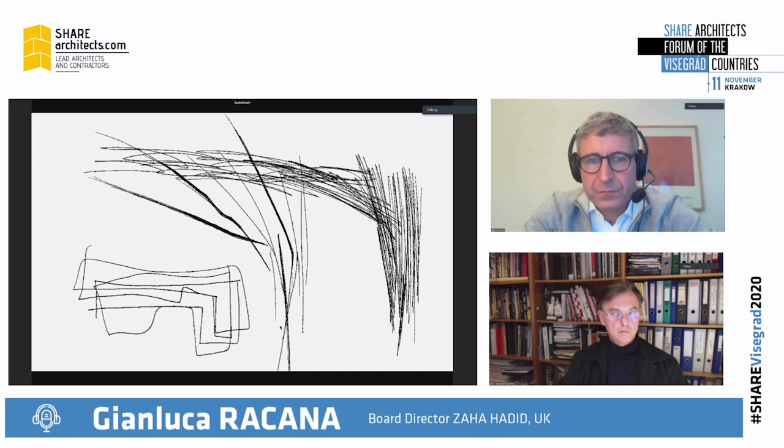We started with ideas of having a building which is not one self-contained object, but a sort of field of elements picking up from the existing urban environment in terms of direction and grain. You can see the first ideas developing how to interlock with existing buildings on site, which we decided to retain. The brief suggested demolishing the area completely, but we retained most of the more important buildings.

We imagined the new museum as a sort of grid or field of many elements, starting from the existing building on site, to the point that it didn't have a facade on the main street. The idea of porosity also plays with the notion that the outdoor landscape is as important as the building itself, following the same design direction and quality, with indoor and outdoor spaces in between—from the enclosed military site to completely opening up on two sides for the new art center.

These are some images during construction and the first exhibition. I think it was a great achievement in that we created something where visitors could explore the interior freely, not regimented room after room.

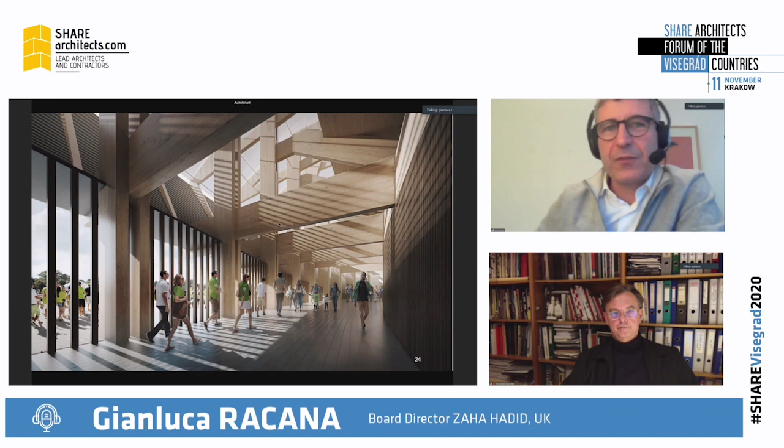Again, it's conceived as a community stadium—you can see it's completely open to the outside. There is no overwhelming presence of retail or car parks, and this has been a great achievement. With the local authority, we're now working on the construction stage.

Building can also have a nice social value. I think this is another example of one of our projects, in Cambodia. It's an institute for research, but at the same time a memorial for the victims of the Khmer Rouge. This was done in collaboration with an academic from Cambodia who himself lost his family during the genocide.

So it was a highly sensitive theme to put into a building form. There are also very grave environmental issues with rain and climate change in the area.

So on one side we wanted to design something sustainable as a building fabric. You can see we resorted again to timber structure and the local way of creating spaces with modular elements, but also to create a landscape in front of the building which acts as a water reserve when the monsoon rain pours in, so as not to flood the rest of the city around it.

This sensibility is important for every project—cultural sustainability is part of our future urban life. Another element, as I said, is an acceleration of trends, and one of these is data-driven design.

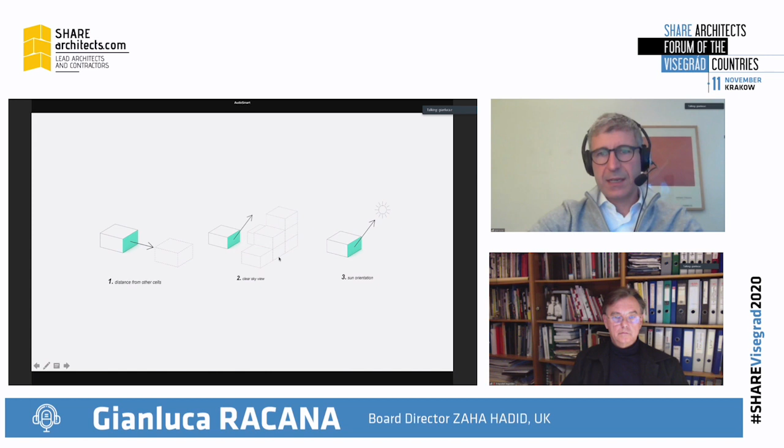With this system we generated a number of options, all valued on a numeric basis. In terms of fabrication, we work with companies to achieve maximum prefabrication—it's clear to everyone in the industry that off-site fabrication is the future, first of all because it's polluting less.

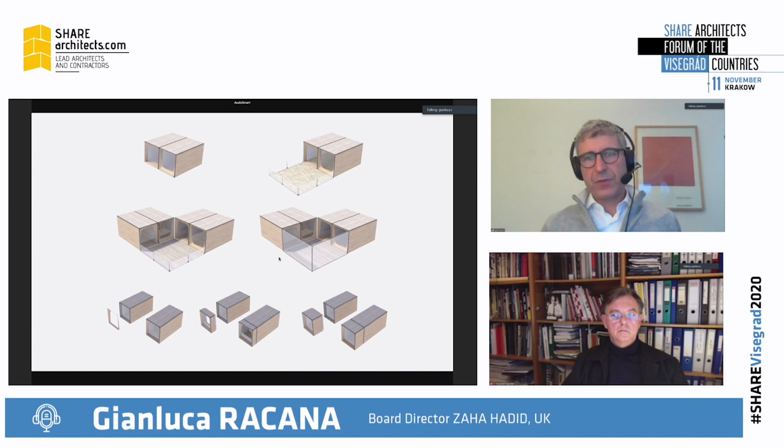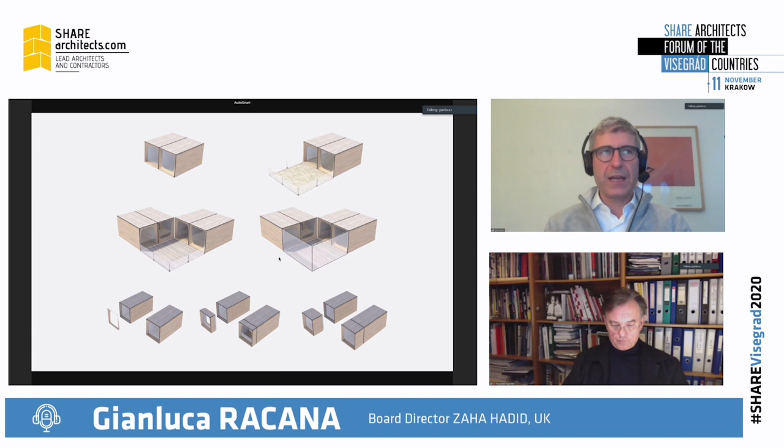The second approach spreads the economic benefit of a building over a larger area. Especially in the UK, most of this manufacturing is based in the north of England, where labor is potentially more available, and where it's possible to have mass production using renewable energy, bringing in finished components to contain construction time. This is clearly energy efficient, and it also gives less nuisance to the city, with less traffic from heavy trucks bringing concrete and pouring wet elements.

This is a study we did for Whitechapel in London, showing how this prefabricated system can accommodate the street landscape. Obviously there is some visual consideration to do - you can't just copy paste the same model everywhere in the city. These are some of the material expressions, with the idea to introduce...

...gardens and production of vegetables on site, on the roof, and between the apartments. This is a new component that goes on the lower floor, with spaces for co-working and for know-how sharing. I think these days, with the pandemic, co-living isn't one of the most popular themes, but I'm confident that once the pandemic is out, this will be part of our city landscape more and more.

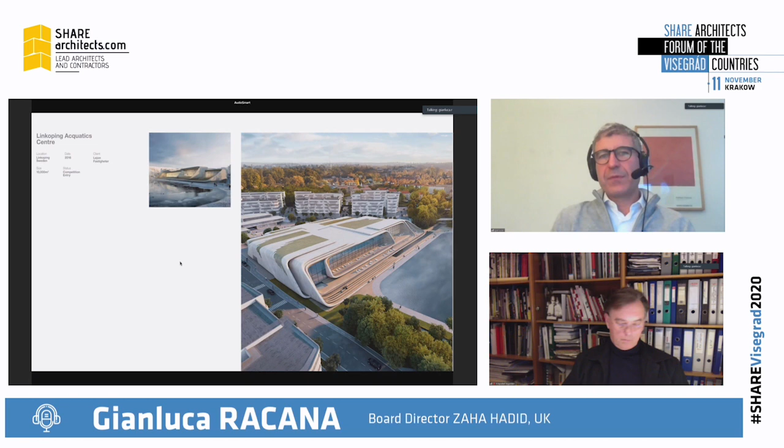Again, buildings need to be green, they need to be sustainable, and they need to be healthy. One part of that is just to reestablish a certain link with the natural environment. I think a building can either impose itself on the natural environment or can play with it. This is the case of a project in...

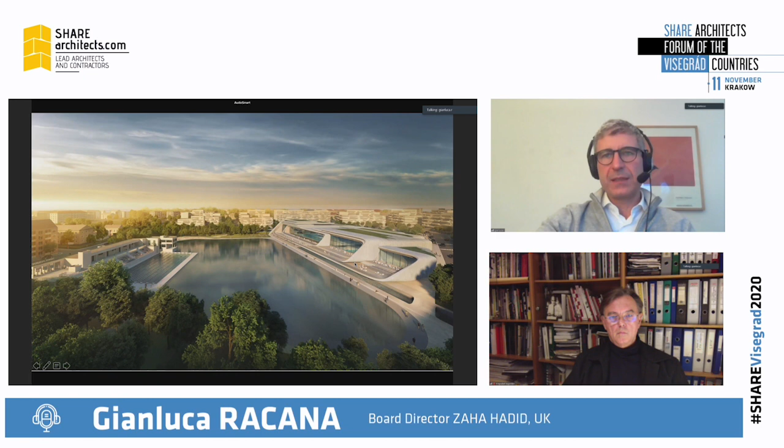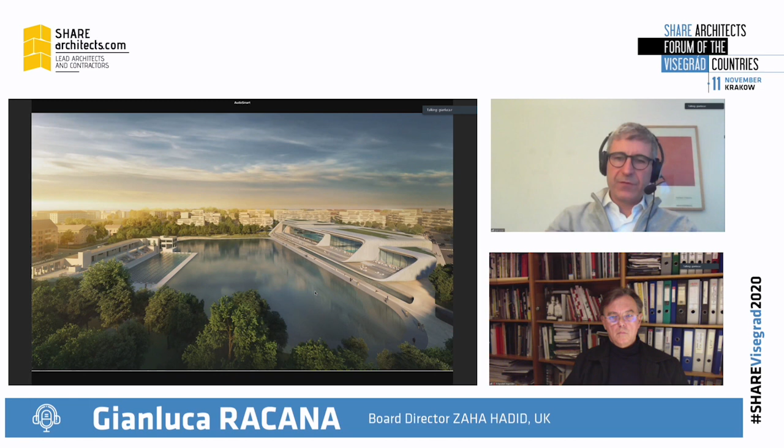Scandinavia, in Sweden, where we were called to expand the existing city pool on the edges of a lake. The idea was to reduce the lake somehow and put an extension of the swimming pool there. Instead, we proposed to keep the water as it is, make the building as compact as possible, and play with the formal edges of the building and the water, so that the building component and the natural one play together, using natural materials to create an environment which feels and looks as natural as possible.

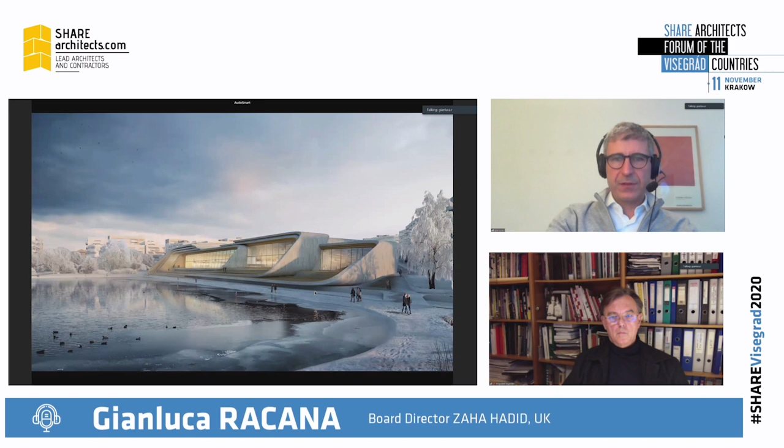These are some of the visuals. During the winter, the lake is frozen, so there are certain types of activities. During the summer, it's open on terraces - there's as much outdoor space as indoor space here for the swimming pool. So this is in terms of the building.

I think there are other issues which the pandemic has brought over to us as designers, and the main one is work, the office. Design of the office, how the working will be - I think this will be one of the bigger consequences of this pandemic. Work will not be as it used to be. It will be at home, as we all do now - I guess you can see from the background, most of us. It can be in the usual working space, or it can be in a third place, which can be a coffee shop, a park, it can be everywhere.

This poses a problem, especially in cities like London or New York, where there is a consolidated downtown, a consolidated city center for offices, which is a single function occupying a large part of the city. This has been addressed already somewhere else - we work in Australia quite a lot, and I know that...

...this is a project in Melbourne, which is coming up consistently on top of the quality of living rankings, together with Copenhagen and other Scandinavian capitals. There was a program that started really 10 years ago to allow the city center to diversify from purely office use to a mixed use - residential, retail, hotel, leisure. I think this site in Collins Street is the main avenue.

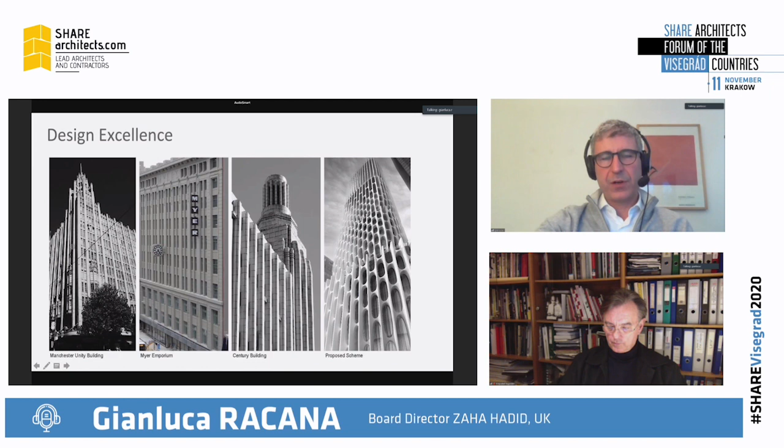But obviously as well as the ground floor and the public realm activation, Melbourne is famous for its alleyways, which started as delivery side streets and now are the center of life in the central business district. The CBD of Melbourne at the moment is the center of the nightlife of the city. Increasingly, there are bars and cinemas, they start to be resident. So they achieve, in a way, a mixed-use community, which goes away from the pure office use of the city center.

And in our project as well, we created a passage between the two main streets. We created a building which you can see on the footprint is reducing, so it's opening up. All this paved area is new with a sort of public plaza in front of the building. And as well, we introduce a real mix of living within the tower.

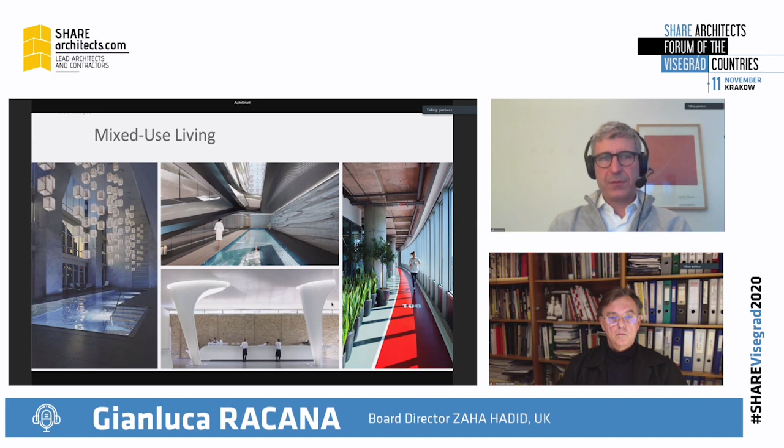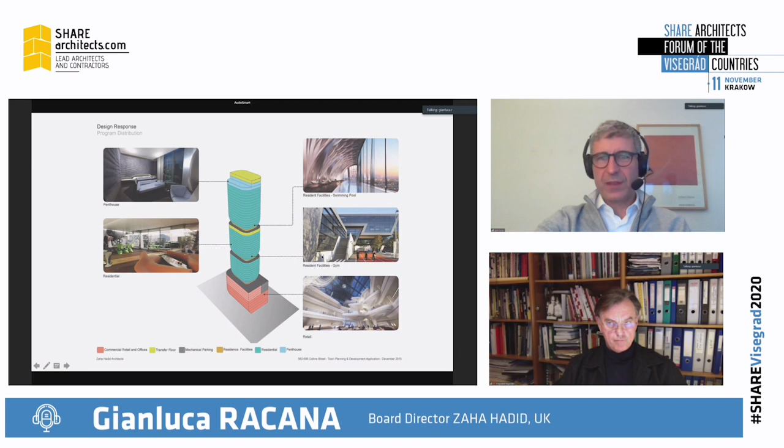The tower typology was given because on that location there was a taller tower before that was demolished. The mixed-use living in this tower we designed to express that, with changes of shape for the top, which is the resident area, to the mid one, which are service apartment, hotel, office, and food and beverage and retail. You can see every time there is a change of function, there is a common space for the resident or office worker with a terrace attached. And on one of them, there is a gym running track.

So I think this is an interesting example of how a large part of the city, which at the moment in the city center is only used for offices, can be reconverted. But I think today we're speaking as well of a different trend, how completely residential areas can provide a mix of function, maybe with business, maybe with an office center.

So we can reach what is the 15-minute city, the ideal polycentric city where residents can reach by walking or by bicycle all the functions they need in their daily life, and they don't need to travel by private or public transport to a faraway city center.

Speaking of mobility, I think transport and moving is one of the predictions or trends we can see - moving will be faster, cleaner, quieter, and safer. Obviously there will be much more emphasis on walking and bicycle lanes, and I can show you some projects later on where we address this. But first I want to touch on city mobility and public transport.

This is an example I wanted to show of two metro stations in Oslo we're working on, in the Fornebu area. This island was the former airport, which was decommissioned, and now it's a mixed-use area, which is a very important urban project in Oslo. We did a competition, and we won two of them.

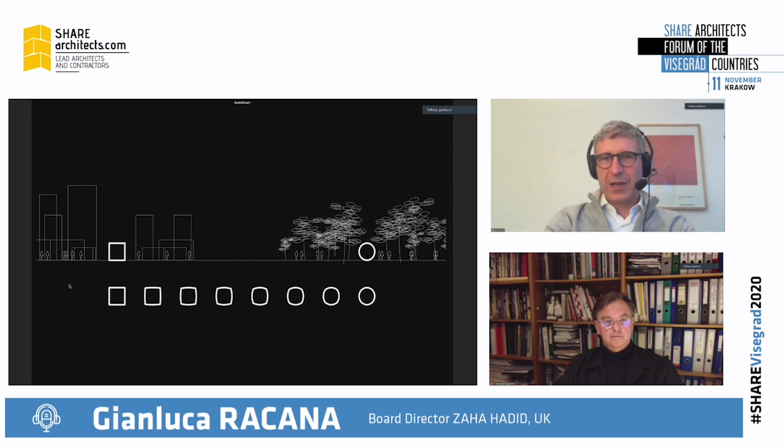We play a bit with the idea that the station is somehow the bridge between this natural little park and the city, and the office block where the other exit is. And as well with the idea that we want to give the user a clear idea of where they are in the station, by giving a visual reference, or formally connotating the station entrance with a square or a circle. You can see the two different shapes of the entrances.

But that's why we wanted to give something else as well - we call it the sun below. We want to give people entering the station a sort of experience of time passing on the top. This is a very interesting study we've done with a lighting artist, where the quality of light outside changes during the day - it becomes from red to more blue and then red again.

It comes from a different angle. We thought it would be great experience for people using the metro every day to see that character of lights changing in the station, to know what time it is outside, and to have a different point of view of the infrastructure every day.

In the Scandinavian countries, natural light is very important. I've found by working there, we obviously have very long nights during the winter. So the summer and the natural light is really enjoyed by all the population.

So you can see how it's a simple system of lighting. They start from the square part of the station, which is the office part. It can change by changing the LED lighting behind this panel. During the night, you can see a much warmer color.

This is the other side, where, let's say, this is the evening when the sun is low, so you can see this kind of lighting around, at a different time of the day. I think it's a very simple little trick, but I think it gives the right focus. Infrastructure and transport needs to deal with passenger experience first, rather than the engineering part, which obviously is taken for granted.

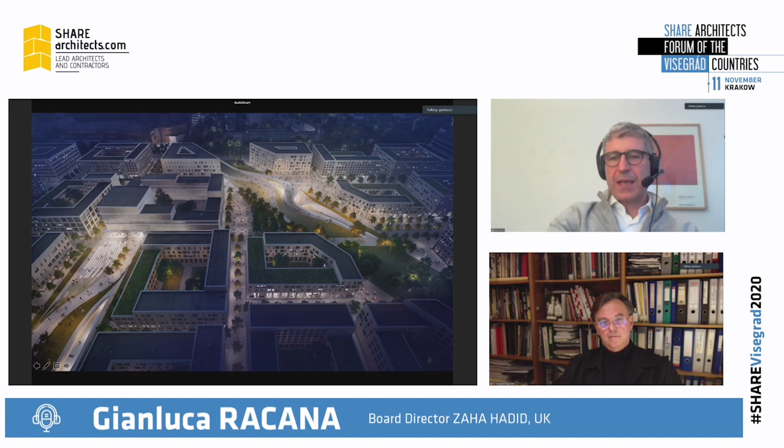We did a second station on a similar theme, with two exits, one within an existing building, one on the park. Again, we wanted the station not simply to be a staircase going down, and it refers again to natural themes.

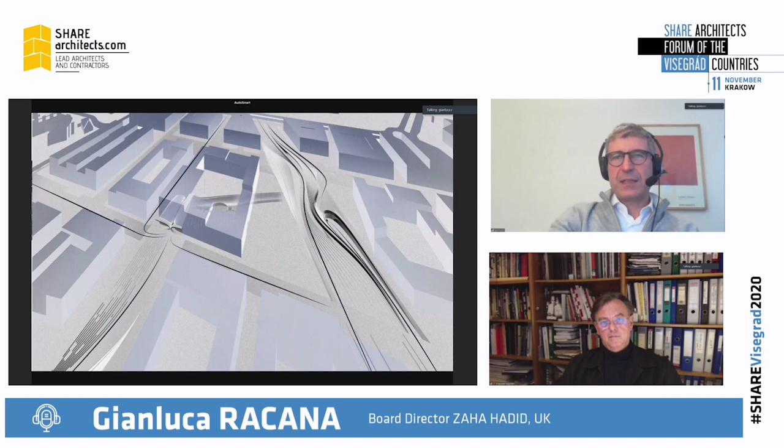You can see this idea of the glacier, but we also provided a very big ramp for bicycles to arrive directly on the mezzanine and park their bike there. This theme is very present inside the station, again playing with natural shapes.

And this, I think, was a very nice experience. We're still working with the authorities on the tender drawings. I think we're really enjoying working with all the hundreds of engineers on the line, to have something different which will enhance the experience of the user.

Speaking of infrastructure, the same applies to bigger infrastructure. This is a high-speed train station in Tallinn. Again, transport is needed to commute from one city to another. It can be a kind of shock for the city fabric, especially when you bring a new train line within a city, which automatically becomes a sort of cut.

I think Tina was speaking before of the highway, and the rail or the big avenue or big road in the city. I think the rail can do something even worse, I mean, just completely cut two parts of the city.

So when we designed the station, we looked at it as a bridge. That was the main idea of the competition that we successfully won. The station itself is a bridge going up. It's completely open to the public. Then from there, you can go down to the track.

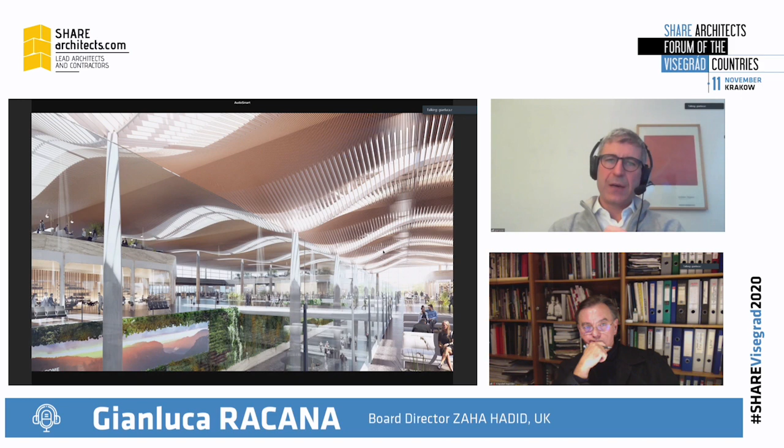Another problem with terminals at the moment is that they're fully sealed and air-conditioned, and they don't take the opportunity of natural ventilation. In this case, we designed a completely openable ground floor, so in mid-season you can just allow the air to get in. We designed it so you can see the recycled timber roof, which allows a lot of natural lighting, with the use of double-height space to let the light go down into the building and minimize the lighting requirement.

I'll speed up a bit more because I see maybe I'm going over my time.

Finally, the cities, which is our focus. Cities will be more green, more walkable, quiet, and bikeable. This is an overall trend we've been seeing for years, and it will consolidate after the pandemic.

Speaking of walkable cities, I'm quite proud that we did a study in 2017, three years ago. At that time it wasn't received very well because it sounded a bit crazy. There was an idea we called Walkable London, in which we suggested the city mayor close some major boulevards to traffic and make them completely pedestrian. Our idea was that people don't walk because the bigger, more direct routes in cities are the most traffic-heavy, and you don't want to walk alongside a truck or high noise.

So you end up taking a car or public transport. If we free up the main avenues - in London, Oxford Street, the Strand - and make them completely pedestrian, there's much more chance people will walk and bike there. From that grid, we open up areas where the distances are much closer. I don't have time now to show you the whole study, but it was done with serious computer modeling.

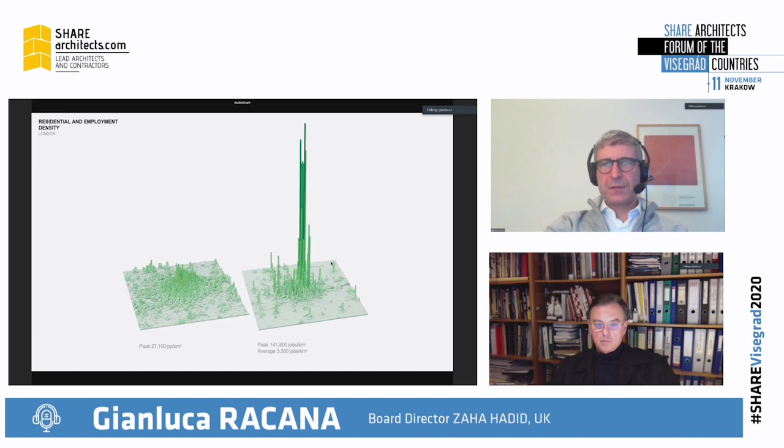Obviously the city fabric is very important, so that works much better in a more compact city - a good case is Atlanta and Barcelona, same population. You can see on the graph the footprint of the city, and the fact that workplaces are concentrated in the city center while residential is spread around. A number of surveys demonstrate that people's happiness - this is a recent survey in London - doesn't depend much on the wealth of the area, but on their proximity to work and to public transport.

So commuting and transport are really a deal-breaker for a city's quality of life. This was the proposal: the main avenue, the secondary one, and the areas that can be completely pedestrianized. This is Oxford Street, the major road - I don't know what time of day this was taken, but it's usually a wall of cars and buses here. That was our proposal, how to make it fully pedestrian and create green space.

We believe this will bring back economic value to the retail and buildings around it. This is again Oxford Street, which at the moment is completely full of traffic - another major avenue in London in our proposal.

We translated this into a small project in Hamburg, the River Promenade, which was a response to the rising water level. It was an engineering competition to raise that edge in Hamburg, and we made it a long promenade, adding opportunities for social gathering. This project isn't very widely published, but we're very proud of it because it responds to an environmental issue - water level - while also giving back to the city public space that was reclaimed from the city edge.

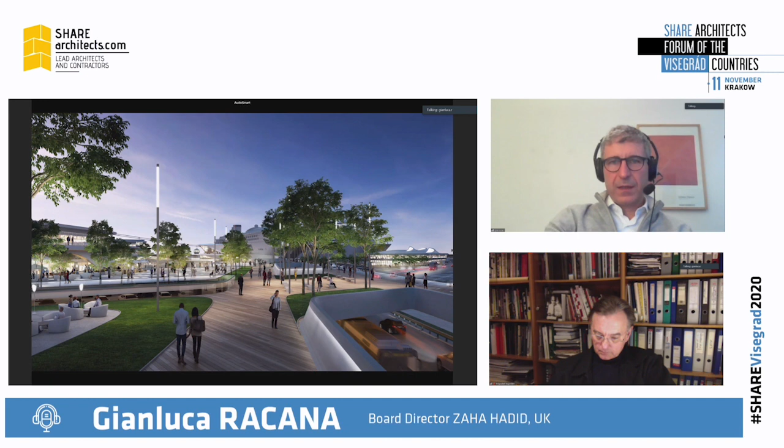The master plan is continuing now. I'll just show you some of the detail, the palette of planting and the mix between the green and the mineral elements.

These are the future expansion areas for residential use. There are residential areas, offices, a university, and some leisure areas on the other side.

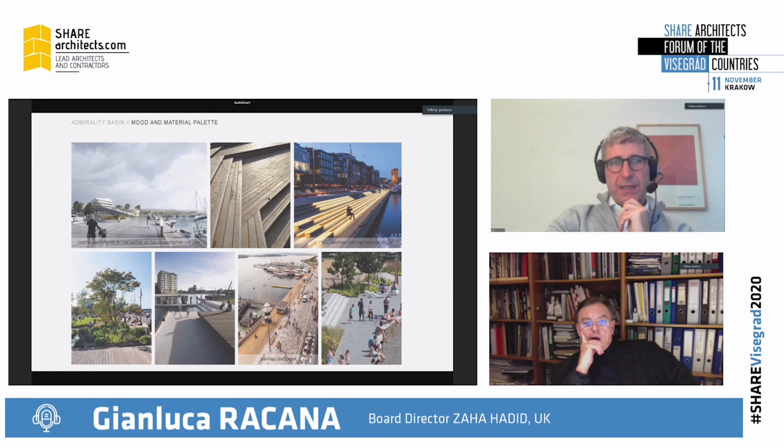So we tried to create that mix of function, always putting a lot of attention on the edge of the sea because of the historical nature of the city, but also the opportunity that exists there at the moment.

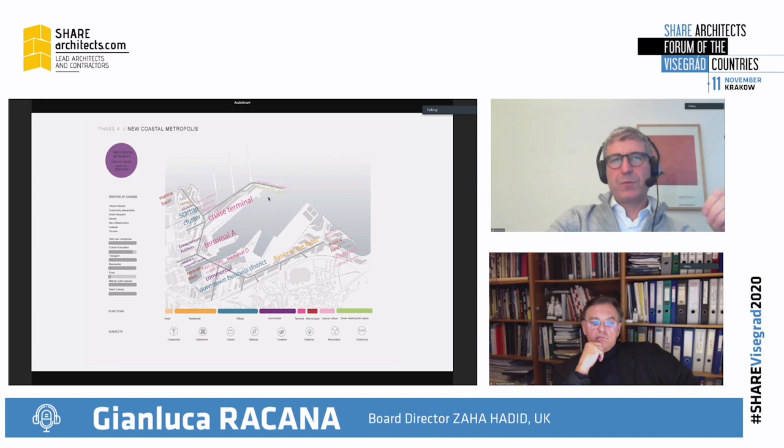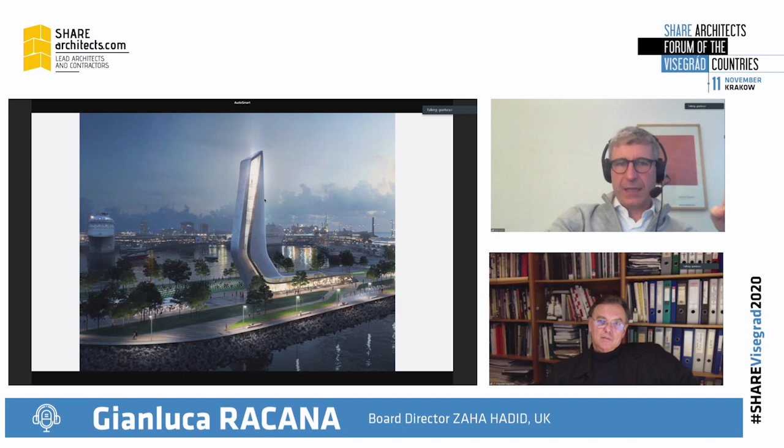We also started looking at how this will be developed within the years. It's a 20-year project with financing that needs to be sustainable, and also how to provide a few landmarks to terminate the boulevard on the edge of the sea.

I apologize if I ran over my time a little bit, I always get a bit taken over explaining our projects. As I said at the beginning, I didn't want to give a theoretical lecture, but I enjoyed sharing with you how we apply these principles of sustainable and socially inclusive city-making within projects at all scales. Thank you.